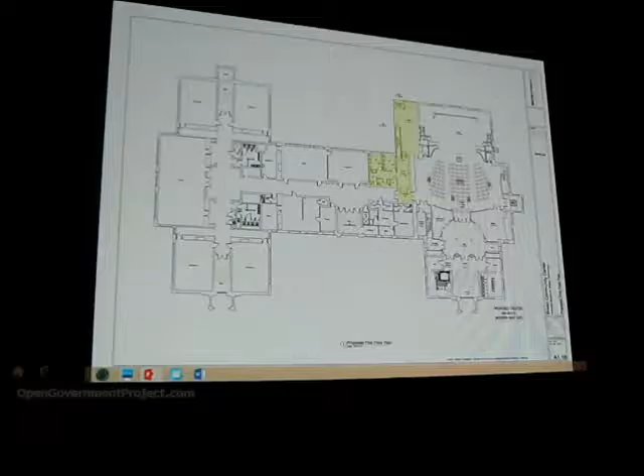On the screen here is the existing condition. So you've seen that before, and you can see in the lower right-hand there, I know it's a little difficult to read, but the existing is 986 in the auditorium.

Thank you, Mr. Rose. All right. I don't know what's happening exactly. All right. Try that again. I was trying to use the laser pointer, but I won't do that again.

So yeah, 986 seats you can see on the lower right. The second floor of the auditorium is where the so-called stadium seating starts, rising from the second floor all the way up to the third floor, with the tiered balcony seats right around the opening to the floor below. And then the third floor just shows the stadium seating coming up to the third floor. So that's your existing condition producing the 986 seats.

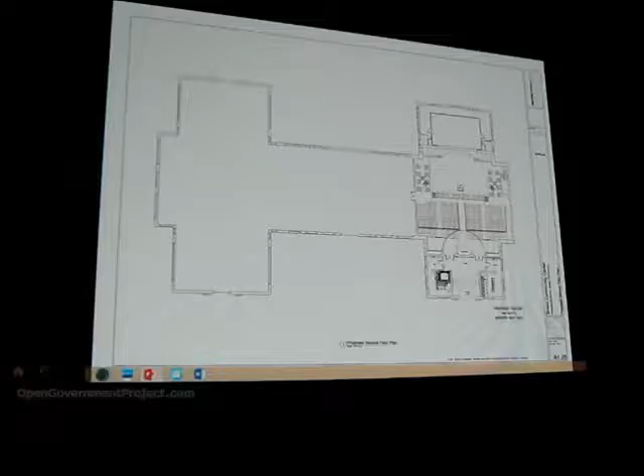The rest of that scheme, as you've seen before, you enter in that main stair or by elevator, and you come into that semicircle lobby. To the left is the ticket booth, to the right is a concession area, coffee, wine, whatever. There's a coat room also to the right, and then a flight of stairs down to the parterre aisle that runs from left to right at the back of the auditorium, and then the seats forward of that.

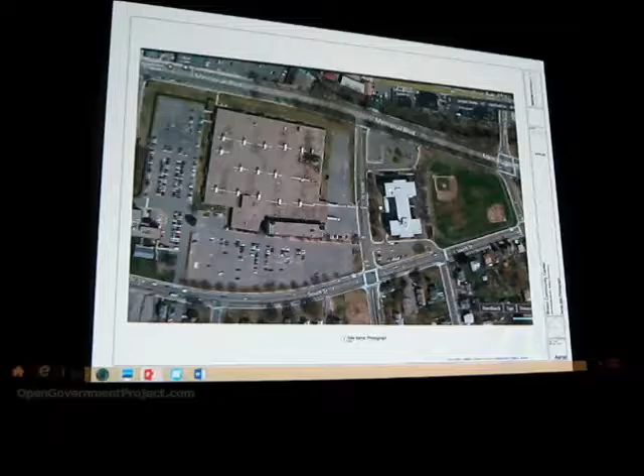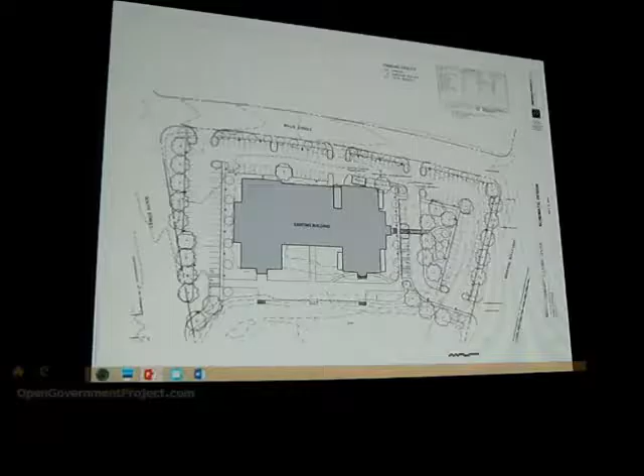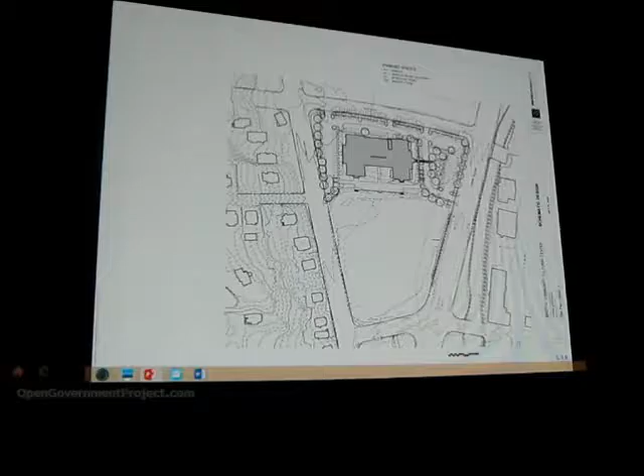The other options are to discuss, at a much higher level, other sites that are available, like the Barnes factory site across Willis Street, but we can't count on that. So I guess what we've come to you tonight with is a bit of an issue. You've got a small site that only generates a certain number of parking spaces that falls way short of the number of seats you're looking for in the theater.

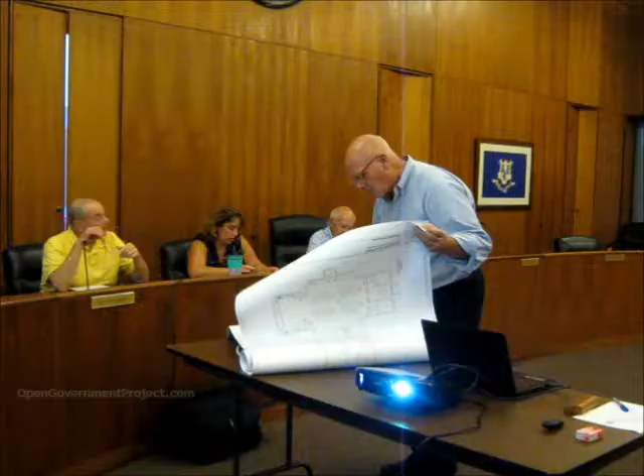How much parking is in those two lots now? As shown in that first scheme, that's 141. And how much would you get if Willis Street closed? You'll only get, I think, another 30. If Willis Street closed, yeah. I believe totally going single lane, which is currently what it would be, would gain another 40 spots. That would put us at 181.

It wouldn't make sense to entirely close the road and use the entirety for parking, because having parking spaces on both sides would actually come up with a lesser number, depending on how it were configured. So 40 seems to be the max you'd be able to get out of Willis Street, whether it were single, one half of it, or both halves.

Now, was the option of parking on the boulevard considered? We've got two lanes, which I understand will be going to a single lane in either direction, with a temporary parking permit, so that if there is a sizable event going on in the theater, parking would be allowed.

Have you investigated that potential? Well, the requirement we're dealing with is for so-called off-street parking. So we didn't talk about that with the planner, but that may be something they would consider. Although based on what I'm seeing in the site drawings, even when you nose in like that, you're not generating a lot more parking, nowhere near what you'd need.

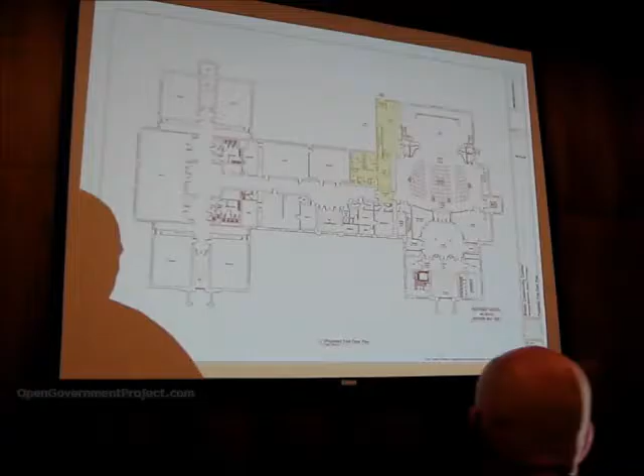Right? So they have to... We got to do something that makes sense here. We want this to be a first-class facility, and we're not going to provide adequate parking.

Maybe we should entertain adding a parking lot. Where? I mean, we're spending all this money anyway. The ball fields, I would suggest, at least off the top of my head, that this athletically intense community would probably not be too supportive of usurping some ball fields.

Then maybe you got to go through the city. I mean, you can't build something that's not going to work. And I agree, you can't build something that's not going to work. Now, certainly looking at other areas, there's the auto parts store. Could we work a deal?

But then how long? I know the gentleman who owns that store is beyond retirement age, so it could up and sell again next week. I take it there's no other city property in the area? There's nothing in the immediate area that the city owns that would be amenable for doing that, no. Not to the size that you would need.

What about the school in the area that has the parking, and we just stipulate that we're going to have a shuttle bus? You see that in the van all the time, they bring people, they're in a van, they bring people to the parking. Does that satisfy the zoning regs? Maybe that will satisfy a variance that way.

Debbie Scher, 6 Pilgrim Road. This is just a shot in the dark. Has anyone approached the Barnes family? They're always so generous to our city. Has anyone asked them to give us a sliver of that little lot over there, to see if they would give it to the city, donate it to the city, or give it to us for a song? Just curious, it's a possibility.

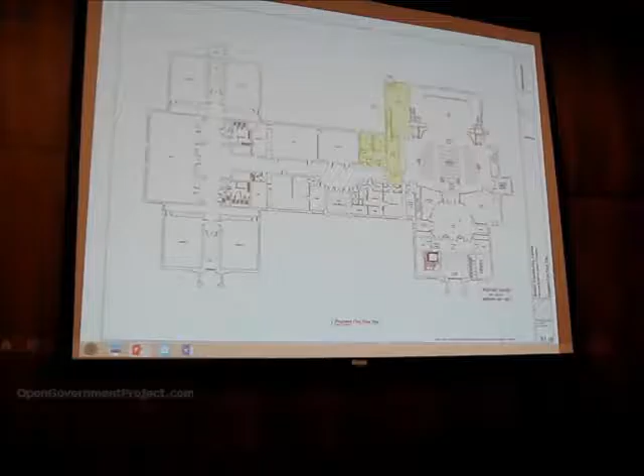Nobody has, right? We use that parking all the time for every single event that happens in that area. So maybe they would be okay with doing something, a donation of some kind. They're always generous, just a thought. I think it's something we need to look at, every single possibility, not just assume we can't. I'm so tired of hearing 'we can't' in this city. Please, Roger, has there been any effort made to contact Barnes Corporation?

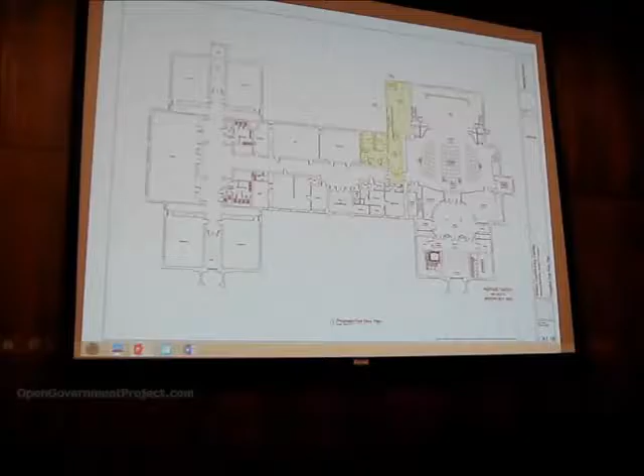I am not directly familiar with that. My understanding is that Barnes Group has been approached in terms of finalizing an agreement, and while they're comfortable with the use of the lot, when it comes to actually putting something to paper, my understanding is that they're very reluctant to do so. But have we, in fact, in the last few weeks made an attempt, or at least a contact? No one from my office has, but I don't know if other entities potentially have.

So who would have that responsibility for us? Probably either the mayor or the Office of Corporation Counsel. I don't think either of them have been approached to do something like that. That will be another option, but basically now the way we stand is we have to look at all those options before we give direction.